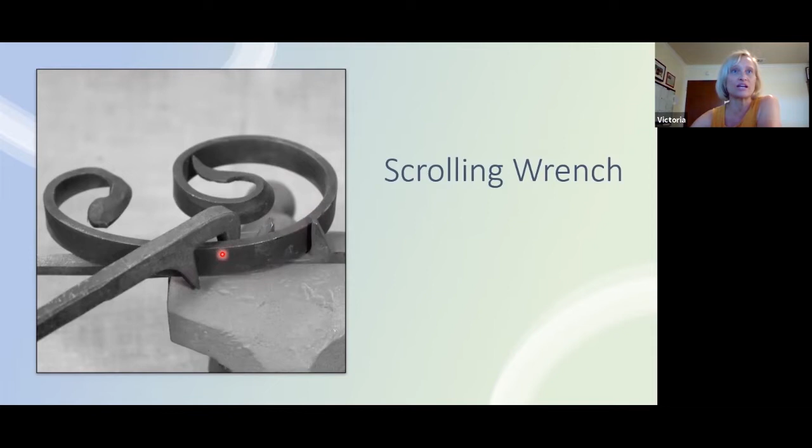The scrolling wrench is made with mild steel, and we can case harden that to get a little more life out of it, but it's not something you're going to be hitting, so mild steel and case hardening should be sufficient. For this demonstration, I'm going to use 3/8 by 1 inch flat bar.

It's a good material to have around, something you would use to make the scrolling tongs. You could also use other sizes. In fact, getting ready for this talk, I made a bunch of scrolling wrenches—I needed to refresh my tool chest anyway—and I found that the longer size, 1 1/4 inch, really needed to be done with 1/2 by 1 inch flat bar. So that'll probably be the next tool I make.

The most common sizes—and by size I'm talking about this gap—are 1/2 inch, 3/4 inch, and 1 1/4 inch. You're going to see those sizes again, so don't worry if you didn't catch all of them just yet.

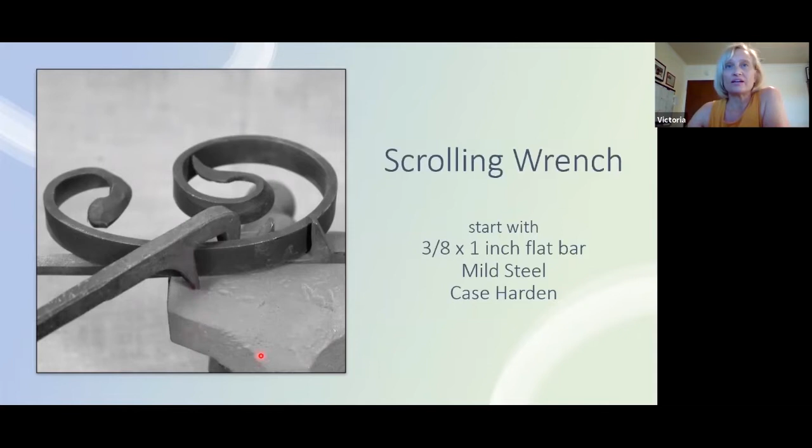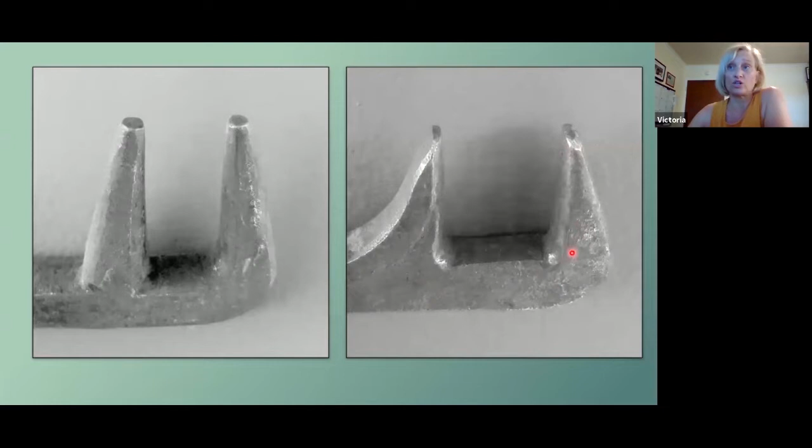The tines are 1 inch tall and can be of various shapes depending on your needs. I'm going to talk you through this Chisel Point tine, but you could also have cone tines, which might be helpful if you're bending something like leaf work, where you have a smaller area you want to get into and bend. This will be 3/8 inch wide and might not be as amenable to a tighter spot, but the Chisel Point, I find, works well for just about any bending I've needed to do.

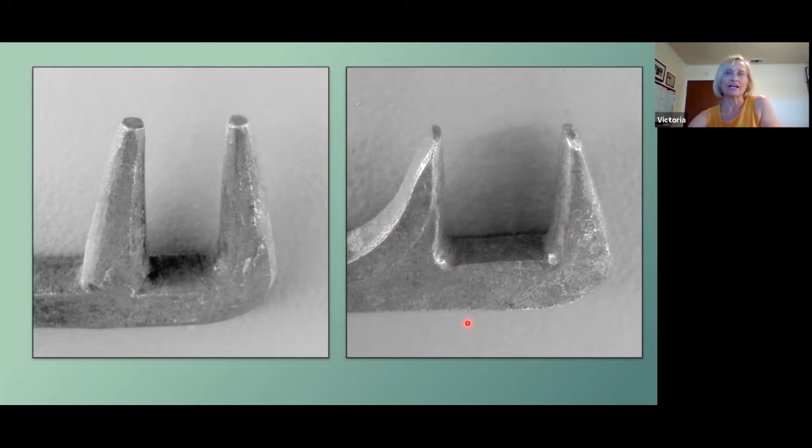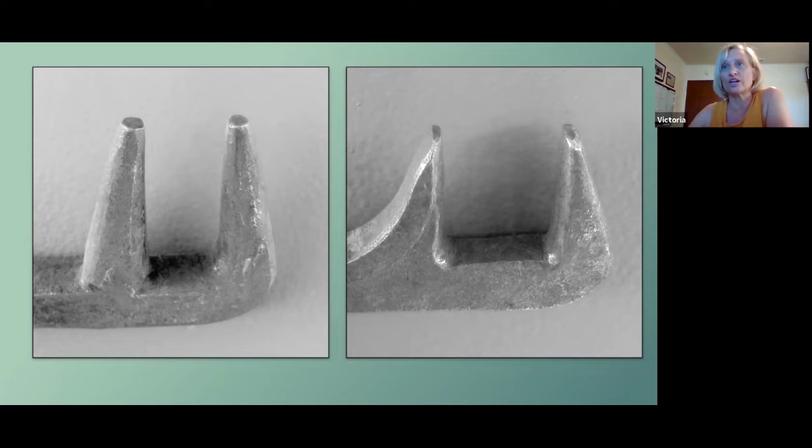The key point here, though, is that these inside edges need to be softened. If they're left very sharp or square, you will gall your work, because remember, the work is going to be hot when you're bending it. So the softer this edge, the less disruption you will have to the tool or the metal you're working on.

Our goal is to end up with something that looks like this, and have our tines line up evenly enough to file them into the right size. We're going to start by laying on our 3/8 by 1 inch bar about 1 inch, and set that initial shoulder over a rounded edge.

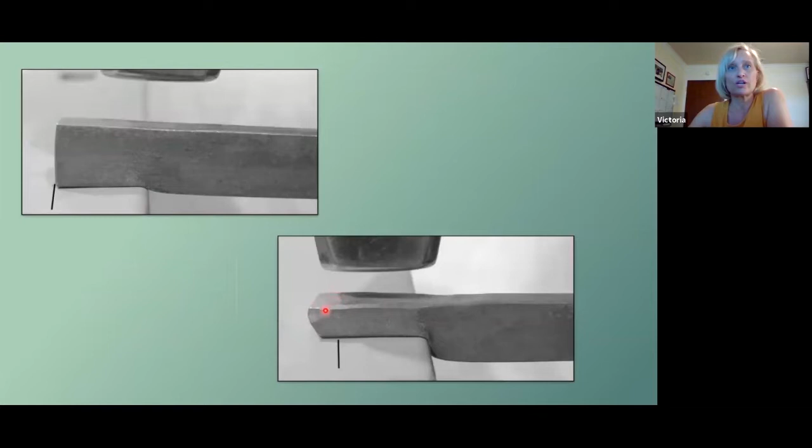As you do this, you're going to draw this out to a 1/2 inch square, and be sure to chamfer those corners. Anytime you're working with something square, softening those corners as you work helps you keep a good eye on how straight your piece is—it helps you see the high spots.

The goal here is to get a half inch on all four sides. That means it'll be a little wider than the 3/8 you're starting with.

Next step is to move to the off side of the anvil and lay off about a strong 1 inch—you want it to be an inch, but remember those rounded corners. You started up here with this shoulder and it ended up over here, so push this out at least 1/8 of an inch past that, or maybe even a little more, no more than 1 1/4, so that you end up with a good 1 inch pillow here.

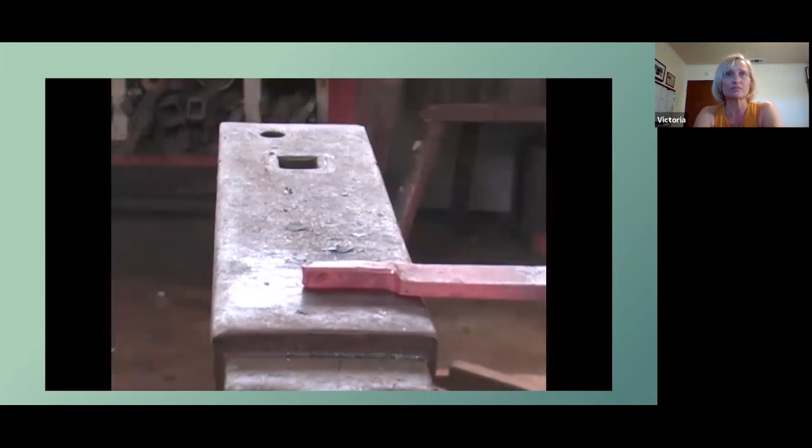Go ahead and set that shoulder down, and then you can start to draw out what will become your handle, taking that down to the same size you did here, that 1/2 inch. So I have a video to watch that in motion: we're laying on that initial 1 inch, keeping everything square, chamfering those edges, and keeping that just a little bigger than the parent stock.

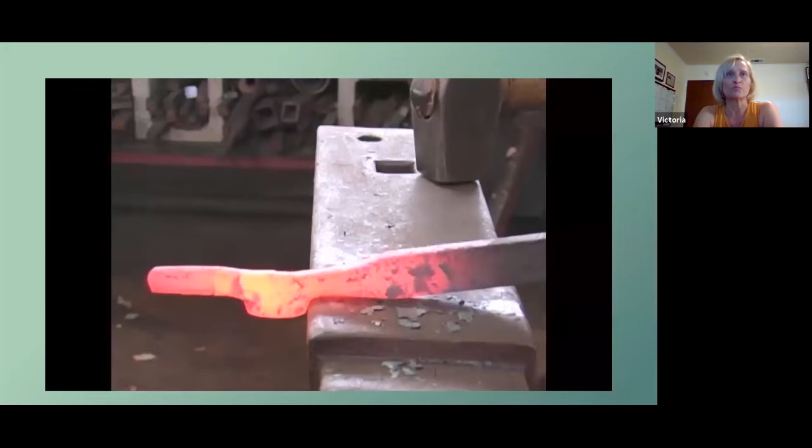Start your pillow on the off side and then draw down your handle. Anytime you're drawing down big material, moving to the bick is a good idea—it'll move a little faster.

So there we have the start of our scrolling tongs with a square on the end, a pillow, and the handle is started. Next, you're going to take that piece that you just forged and put it into a tool like this.

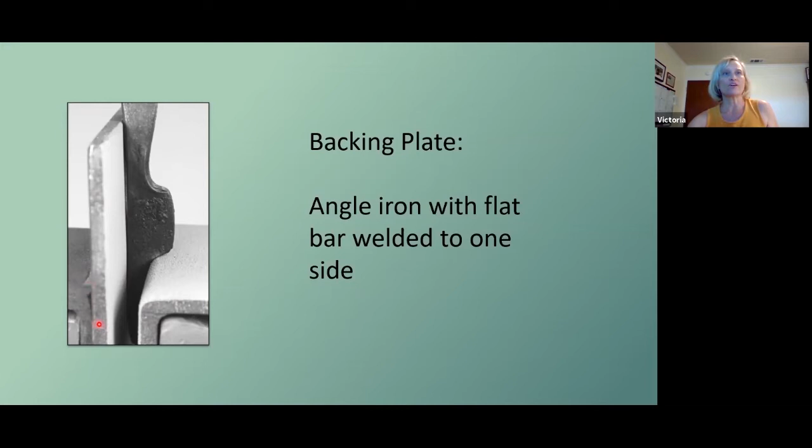The short end goes down in a tool like this—simply angle iron with a backing plate welded to it. You can see a little bit of the weld there. This apparatus placed in your post vise gives you a stable surface and keeps you from galling this backside of your tool as you draw this pillow out into a 1 inch long taper.

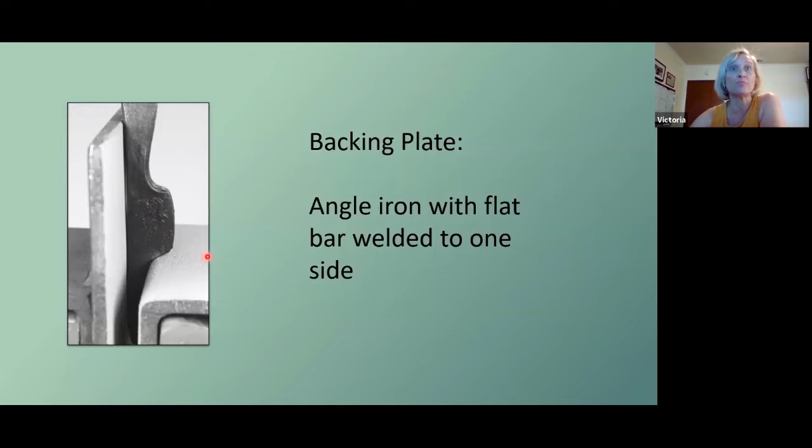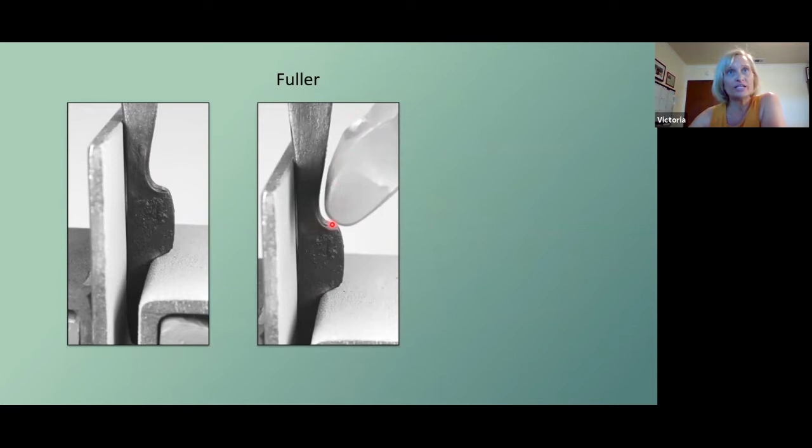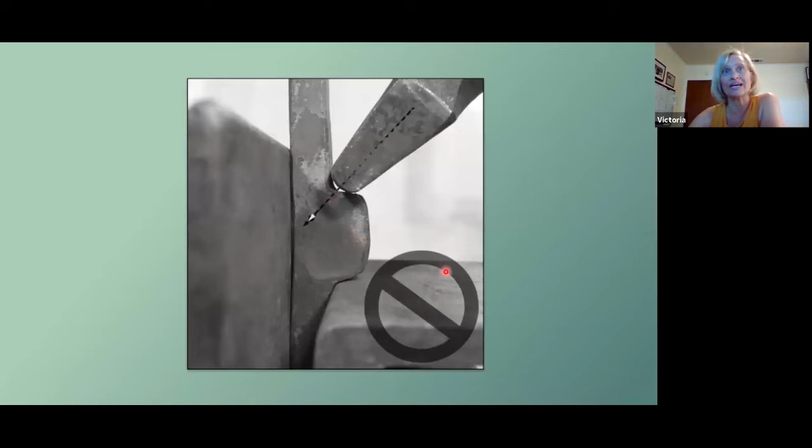You're going to do that by using a fuller, and the fuller needs to be at a fairly steep angle. If it's at too shallow an angle, you'll end up just drawing the material back this way instead of drawing it down and out. So you want to make sure that fuller is as upright as possible.

You'll initially get in there, grab it, but then you want to start pulling it down. Once you've started pulling it down, you can see that's been started—using a cross peen hammer to start to smooth that out will help it on its way.

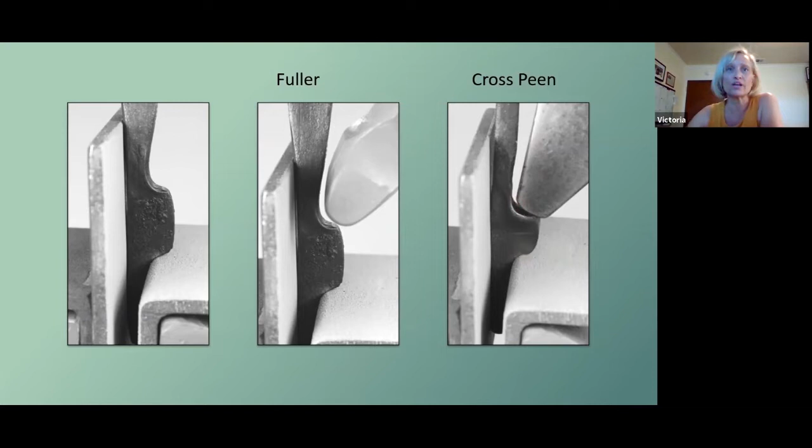As you push this material down and get started on drawing it out to a taper, it's going to grow in width and get thick. It's important to dress that thickness frequently. When you do that, you're simply hitting this here to correct the growth in width and get it at least back to the parent stock.

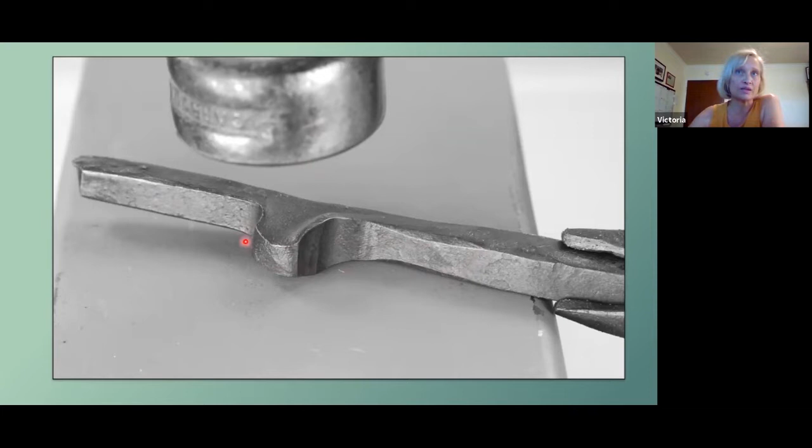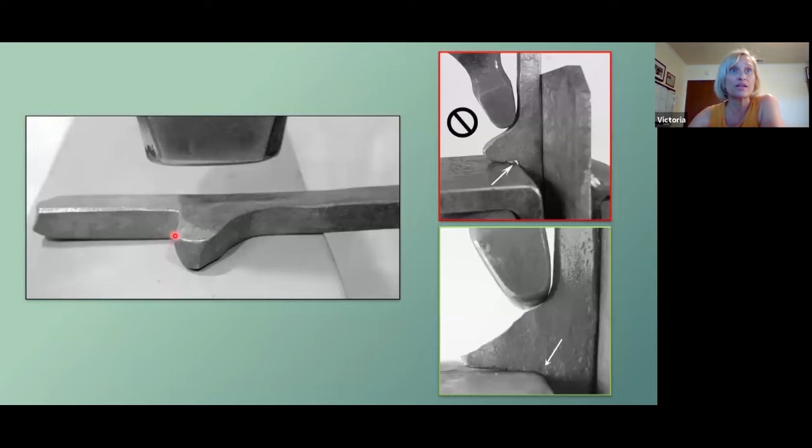This bar right here that you've started is going to bend to less than 90 degrees, like so. This has gone to a narrower angle than 90 degrees.

When that happens, when you put this part back down in your angle iron with the backing plate on the post vise, you could end up with a little gap here. As you continue to squish this material down, that air gap is going to create a cold shut—it's going to create a crack that will make you very sad later. So it's very important that you make sure this is kept at a 90-degree angle.

The easiest way to achieve that is by putting the tine, or what's on its way to becoming a tine, up in the post vise, and using a set tool that you will hit with your hammer to straighten this back out.

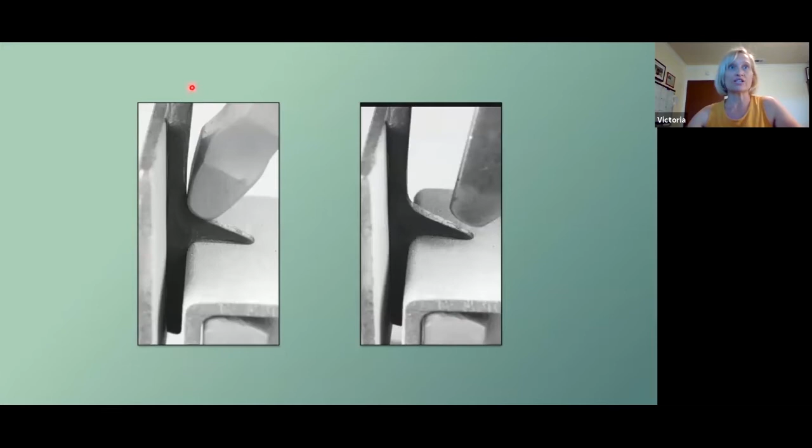Then it's just a matter of going through those three steps: back to your backing plate with your fuller and cross peen to correct for the growth in width, then make sure this is at a greater than 90-degree angle using a set tool.

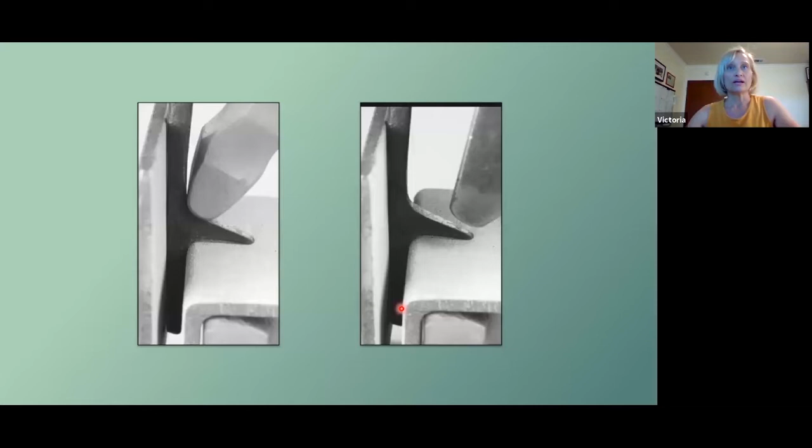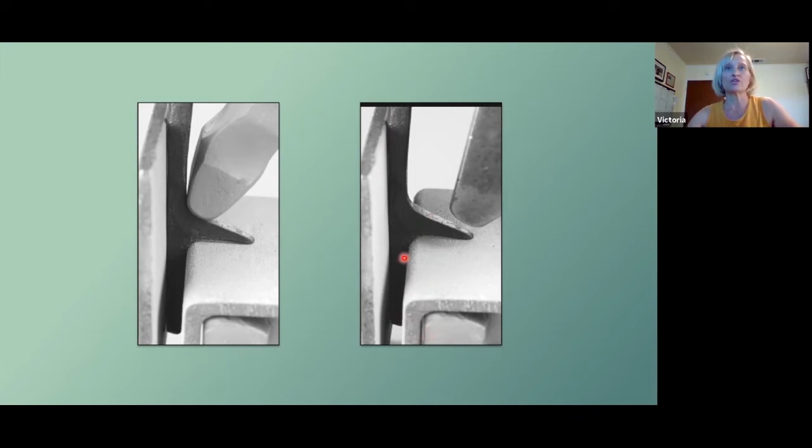I suppose you could hold this flat on the anvil and hit it, doing kind of an upsetting blow to push it back, but you run the risk of landing a blow somewhere else. So putting this in the post vise with the tine up and using a set tool is your best bet.

Then it's just a matter of going through those steps until you have this at about a half inch wide, and this will be 1 inch wide. And of course you want this to match that parent bar at about 3/8 of an inch.

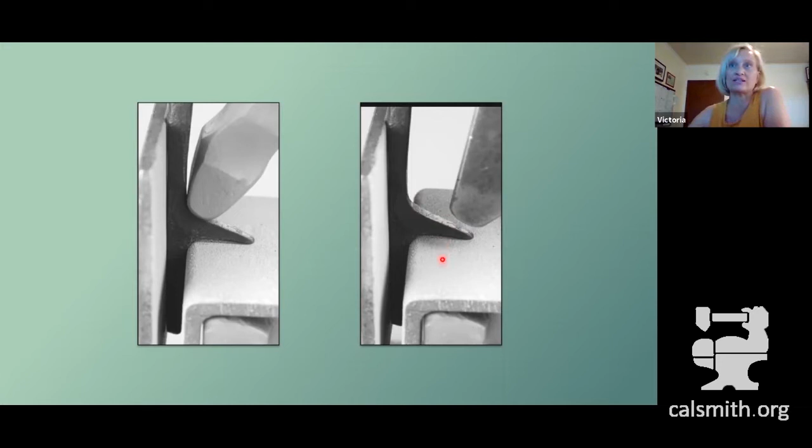So let's watch that happening on a video—get a really good view of this backing plate situation here too. Grabbing this material and pushing it down using a fuller, and this is a very narrow fuller.

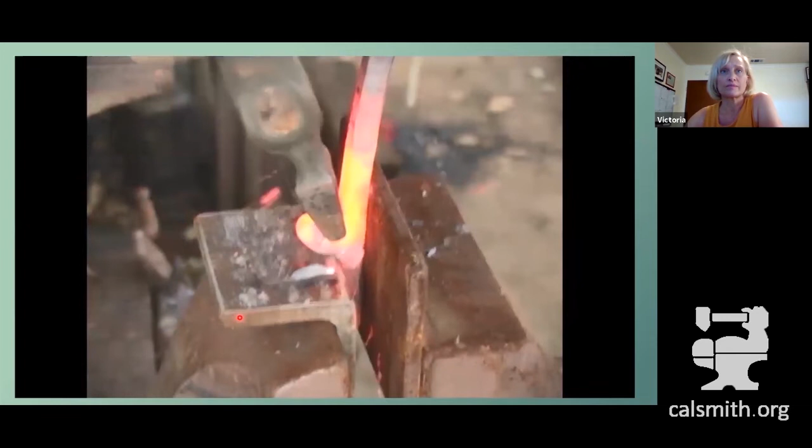Correcting for the growth in width, and then right back to your backing plate and your post vise to continue working that down. You can just see this leg kick up as you correct that growth in width.

So it's time to open that back up, and here's the set tool, opening that back up in the post vise.

So, a handful of heats, going through all those steps several times. Correcting for that width early and often is going to be important.

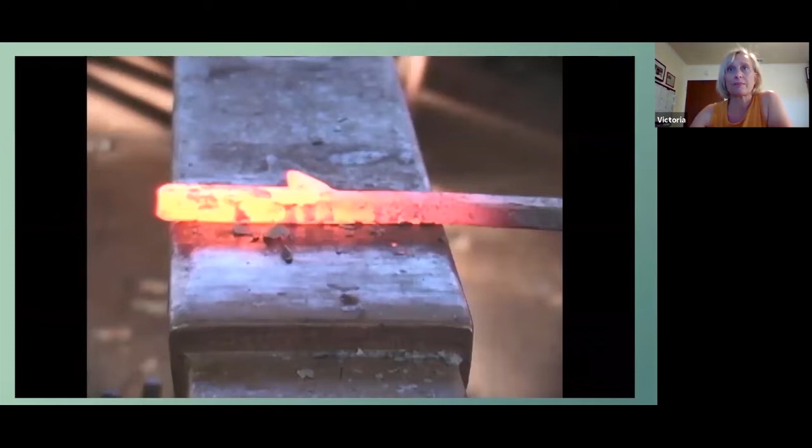So once you have your tine the way you want it, it's time to cut this off to the correct length. And I'm going to give you the answers—and I'll give them again later too on a chart, so don't feel like you have to write this down if you're taking notes.

So if you want a gap of 3/4 inch, the total length that you need is 1 3/4 inches. And I know that because using these three measurements, I can add them up and get to my 1 3/4 inches. The W is the gap, the desired gap or width that I want.

And in this case, it's this 3/4. The bend is roughly the same amount of material as you have width here, so that's a 1/2 inch. And then your height is cut in half because when you make this chisel taper, you are cutting the material in half - it's going to stretch 2 times. You can almost see that if this was its full length, that this is in half right here. You can see the imaginary half that I'm outlining with my laser pointer. So 1/2 of 1 inch, which is the height, 1 inch, plus 1/2, plus 3/4 gets me to 1 3/4 inches. So I cut that off, on the edge of the anvil.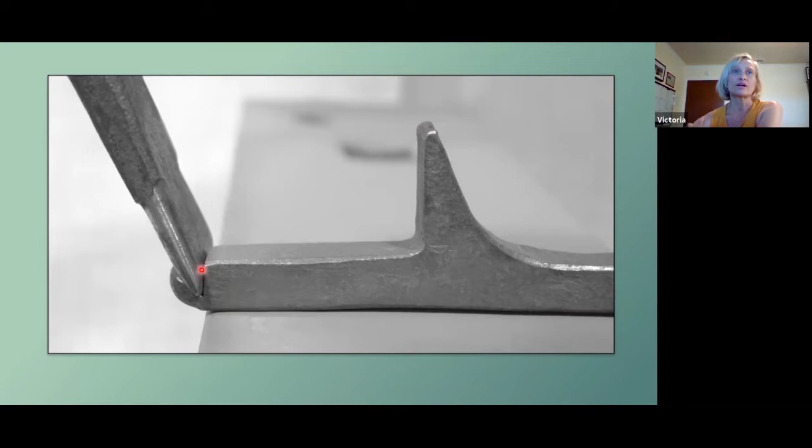And here it's been done conveniently with the tine up, and that gives you plenty of room to move to the side of the anvil. If you want to have this with the tine down, I would cut it at a slight angle so that you're set up for your next step.

Which is to make a taper. What you're seeing here is the tine out, stretching out away from us. It's on its side to remove some material, because we know when we make our point, it's going to grow in width. So if you get ahead of the material and remove some of the excess, you can then place this either upside down on the far end of the anvil, over a swedge block in the hardy hole, or here just on the edge with the tine down, getting your taper started. You just want to make sure you're not dinging up your hardy hole when you do that.

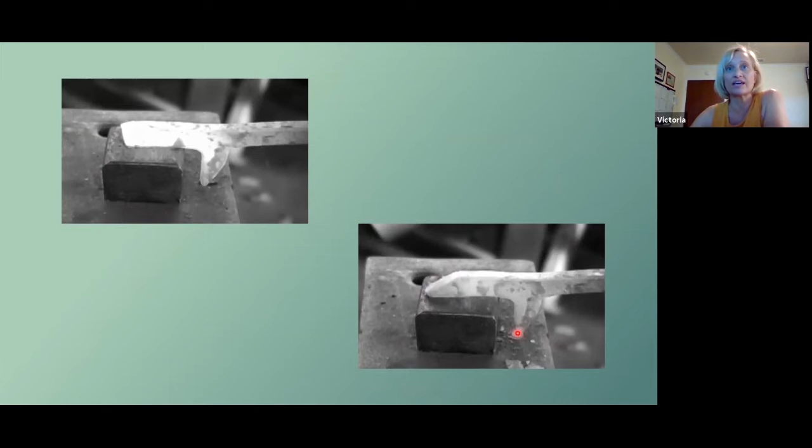But you're going to make a point, a chisel point, which is just a wide point. And anytime you're making a taper, which means you're making a point, you've got to get to the point - make the point first. So a very short point right on the edge. And here it's being done over just a block, a swedge block. So here you see a very shallow point, chisel point, and now you can taper that back to the 1 inch length that'll match this tine.

And here's the photo depicting that with the correct angle on your hammer, and this over an edge. Anytime you're trying to create a taper like this, if you do it in the middle of the anvil, your hammer really has no place to go. It should be angled, and you can see that if this didn't have a hole or a space to go into, you wouldn't even hit your piece - you would just hit whatever your hammer was over. So that's one way to really ding up your anvil.

This is your best chance to soften the insides. So we have our 1 inch taper here set, and just turning it up - you could do this hot with the rasp, turning it up, tine up in the post vise, rasp off both sides, including this tine as well. So now we get to watch that all happen on a video.

So we're cutting it off, a nice straight edge, which gives you a nice clean spot to start with. Remove the excess material, because you know it's going to grow in width as you make that point - get right to the point. Then take it back to your 1 inch, which is our desired tine width length.

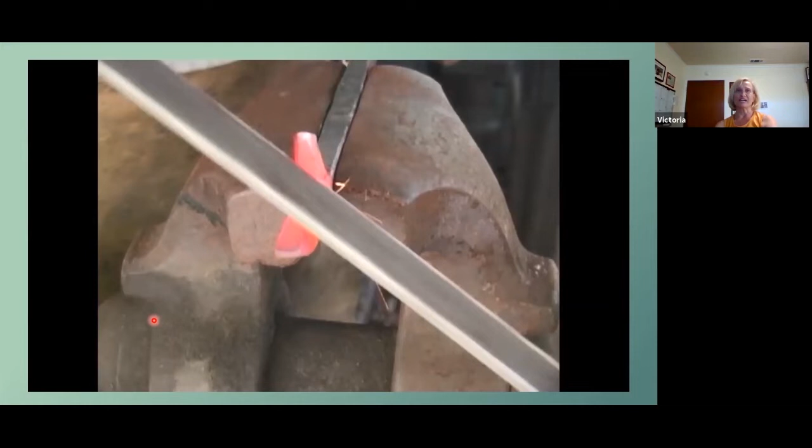Be sure to file it. You're going to want to move on to the next step, so make sure you remember that this filing - this is the best time to do it, unless you've got a whole drawer full of much, much smaller files. So using the rasp, this is the best time to do that.

Now we are ready to bend this around to even up with the neighbor here. And to do that, we are going to bend it around the horn, but this part, we don't want that to bend. In fact, we don't want it mucked with at all. So the best way to keep that from happening is to quench it.

We're using mild steel, there's no repercussions for that. So make sure that you're only putting it down that 1 inch, which, your line of sight is pretty clear here, the edge of this taper, maybe just a little past, leaving enough hot for the corner material and then the gap that you want.

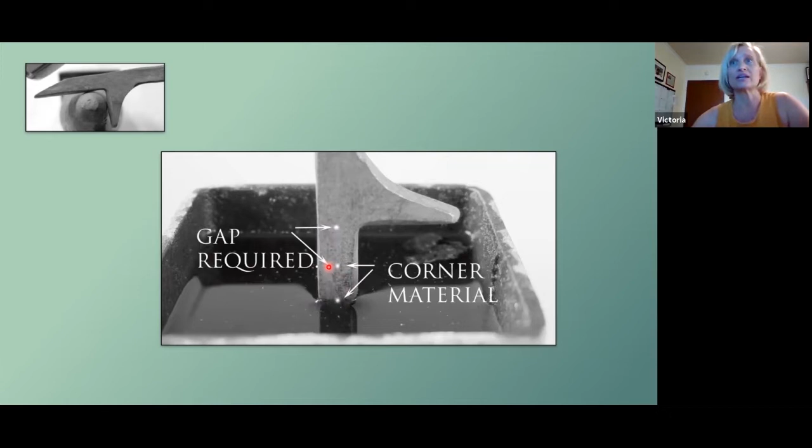Once you've quenched this, move quickly to the bick and bend this around. When you're bending, anytime you're bending, you want to do it over - I always say over air. If you're here in the anvil, it means you're forging and you're hitting or squishing your iron in between this hard surface and your hammer.

So with bending, always make sure you're over nothing. As you bend this, it's gonna kind of push into your gap, and it's gonna bend up here too. So correcting here and bending, just keep your eye on this to make sure this part stays straight.

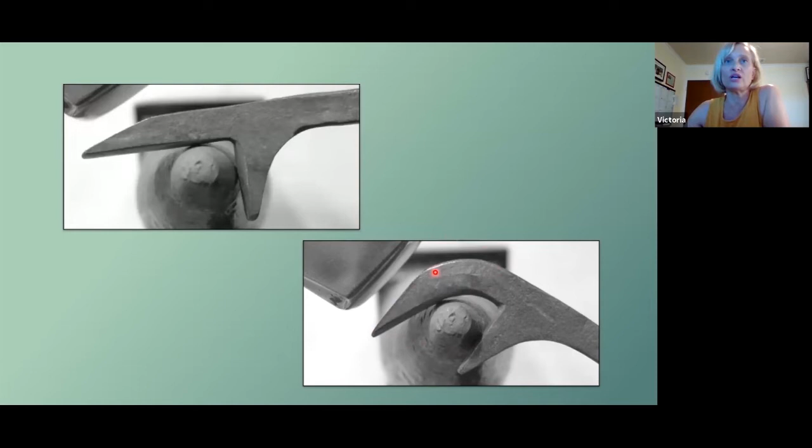What you don't want to do is bend this closed to 90 degrees. You want to keep this open a little bit, because using the method you would use to make square corners, you're going to upset this back into itself and give you a little more material here in the corner. So with this tine up on the anvil, and you might need to take another heat at this point. If you do that, re-quench this tip.

It's going to be important that you're not deforming this. You're going to end up with a little mushrooming, which you see here, and mushrooming is just anytime you hit the top of the metal and it starts kind of leaking over the sides. That's called mushrooming.

So with this quenched, this hot, you're going to hit on an angle. If you were to hit straight up and down, this would just roll out and kind of defeat the whole purpose of the bend you just made. So you want this at an angle, kind of matching this angle. But one way to think about it is you're hitting down towards your knees. Smith is over here, hammer is angled, and you're hitting towards your knees, which is a little different blow than you normally do.

Once you've got that upset back into itself and you have your corner here, and it's not going to be a completely square corner, you'll have this round edge here, then you are ready to heat this all up and put it handle down in your post vise. And here we're using our backing plate again. This is the same angle iron and backing plate we used earlier.

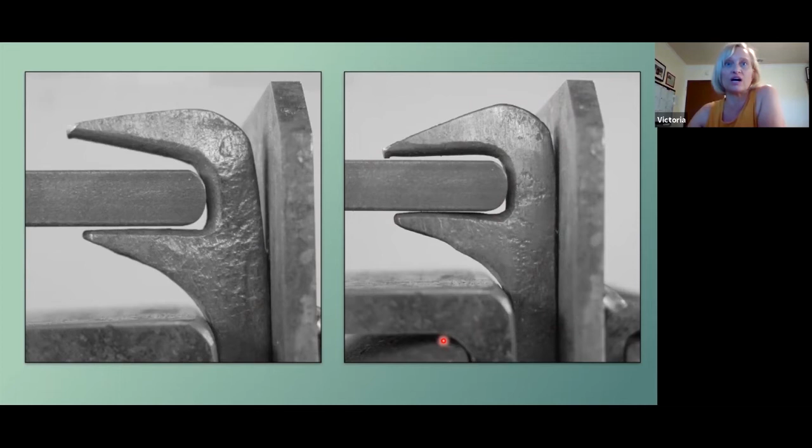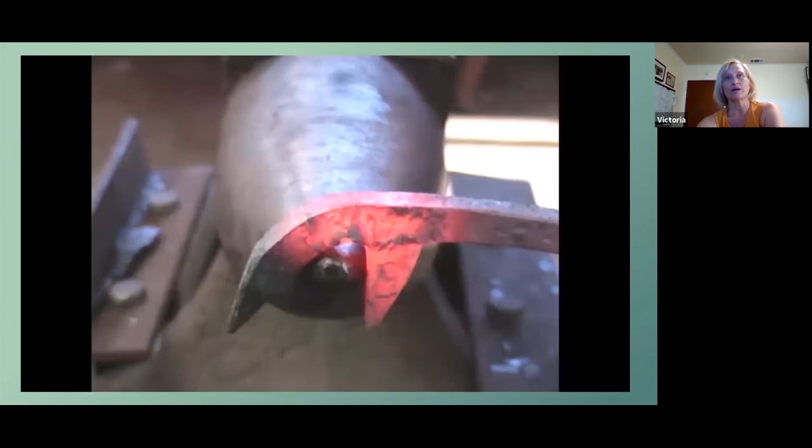Once you've got it standing up straight against the backing plate, now you can tap it down here so that you have your 3/4 of an inch gap, or whatever gap it is you are trying to make. So let's watch that happen. We've quenched the tip, and there it is. You can see this goes up, and you just got to keep it straight, working the bend, working that back the way it started.

You can see the tine is considerably longer at this point, so that angled blow back towards your knee upsets this down into the corner. And you might have to take more than one heat. Definitely had to for this tool here. And then that's just a light tap to get it into place. Make sure everything stayed straight. Sometimes it might get a little twisty.

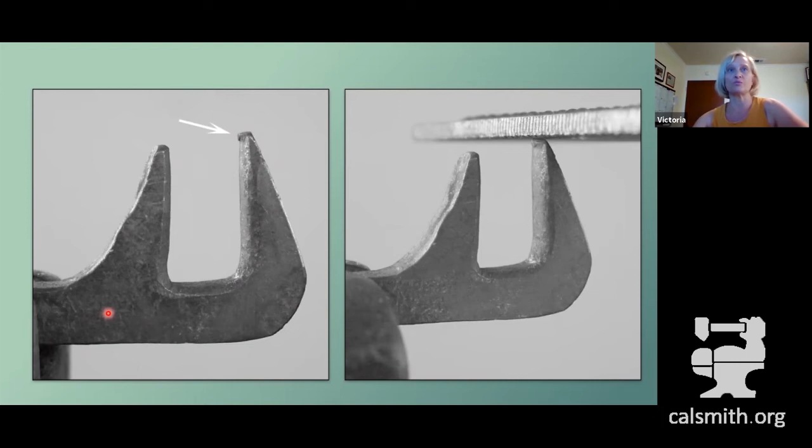And now you're ready to file off any of the mushrooming that happened, or if this is a little bit longer than the other side, you can even things up with the rasp. And you would again do that hot. So once this is made, draw out the rest of your handle, and I like to take it to about 12 inches. I brought some with me here, so maybe if we ask questions or at the end, I can show you those.

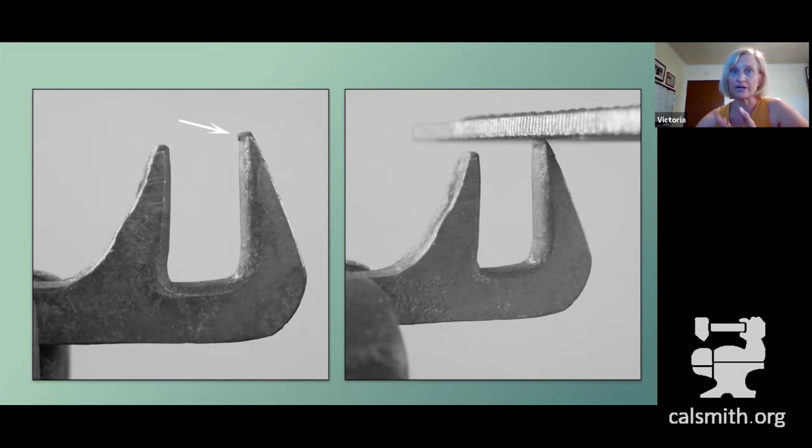I like it to be about 12 inches long, and then at the end you could put whatever handle you want, but an eyelet is a nice feature because now you can hang it up out of the way. And that's just a matter of drawing out a rod to a 3/16 diameter, and it should be fairly even all the way around, and bending this then around into the correct shape. But if you are wanting to be specific about what this internal diameter is, you need to know how long you need to cut this.

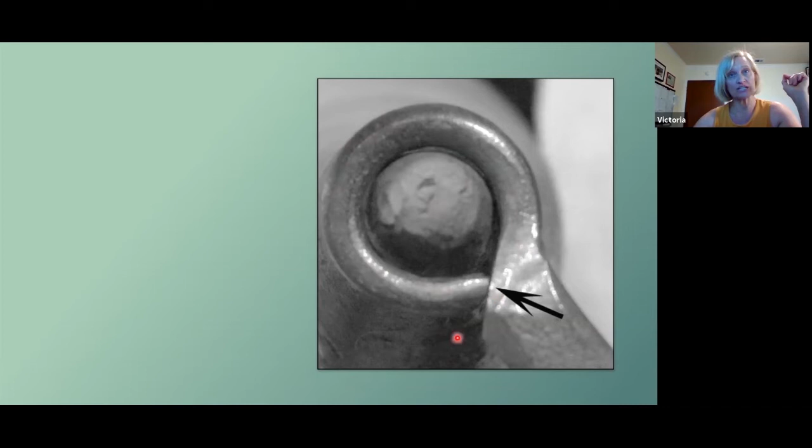So here comes some math. If we want a specific internal diameter of 5/8, we would use this formula, because what we're looking for is the circumference. We're looking for how long this piece needs to be. And that's a simple formula of pi, which we know is 3.14, blah, blah, blah, and the diameter, this blue bar here. And you may be asking, why am I going all the way out to this yellow line? Well, this yellow line is something called the neutral axis.

And it's called the neutral axis because that's the only part of this rod that doesn't change its length as you bend it around the horn. The outside metal has a longer distance to go, so it actually ends up stretching but shrinking this tip right here. This actually gets shorter than what you started with. The inside gets compressed, and that metal has to go somewhere. It'll pooch out to the side, plus make that end longer.

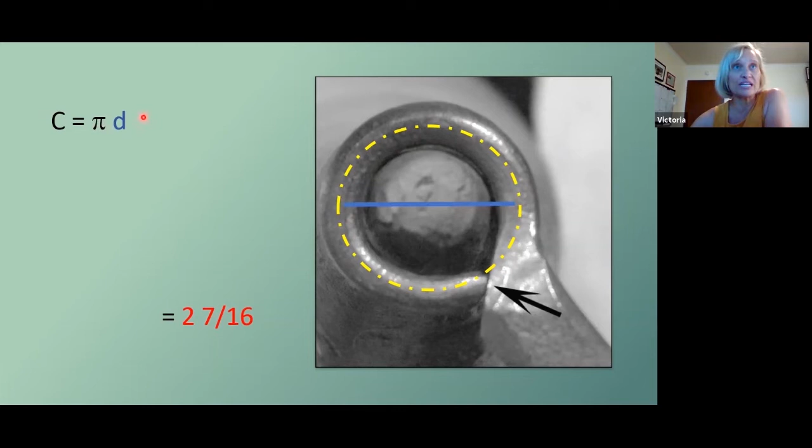If you saw the basket handle talk, I explain it there with some different diagrams. But for our purposes here, you just need to know that this neutral axis is the start and end of the diameter that we need to fill in the formula. And here I've filled it all in for you and nicely color coded it.

So this little bit here, this 3/32 and 3/32, which is half of our 3/16 bar, and 2 halves make a whole. So you just add the 3/16 back in, plus the middle, which we dictated was going to be 5/8. And you'll notice that I'm only using 3 here. That 0.14 for true pi adds about 1/7. And, you know, we're not machinists, we're blacksmiths, so we're not going to worry about that. We're gonna make that part simplified because it's close enough.

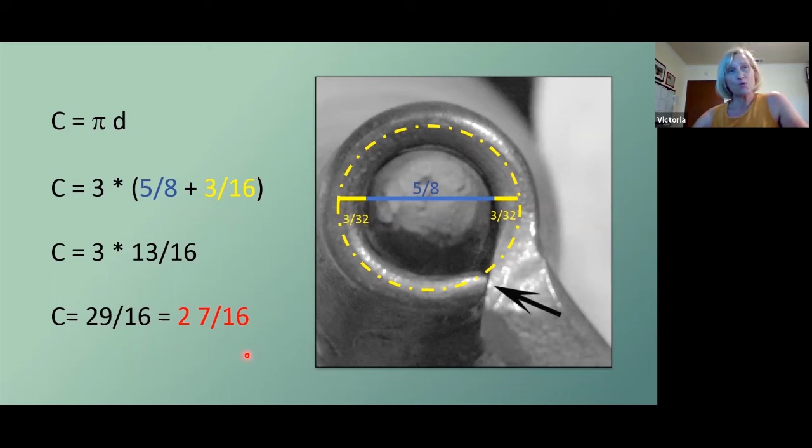And we're just going to take the 3 times the 13/16, and that gets you to the answer that I already gave you, which was 2 7/16. But while we're here, let's do a little more math, because how did I know that I needed to start with 1 inch to get those tines to line up, right?

The trick is to make sure that you have enough material so that you can cut off a clean end. What you don't want is to get to the point where you're cutting off that 1 3/4 and you don't have 1 3/4. You'll be tempted at that point to draw that bar out. Remember, it was a 1/2 by 1/2 square at that point. You'll be tempted to draw it out, which is going to make it kind of weedy. We want to leave as much material there as possible. So it's important to know what amount you need to start with to get the right amount here.

Now you could just hedge your bets and start way back here and make a nice long taper and then cut off your 1 3/4. And that's an acceptable practice. But if you want to take your blacksmithing to the next level, understanding a simple concept that allows you to do the computation to get to the right answer is going to be extremely helpful. It'll also really impress your friends.

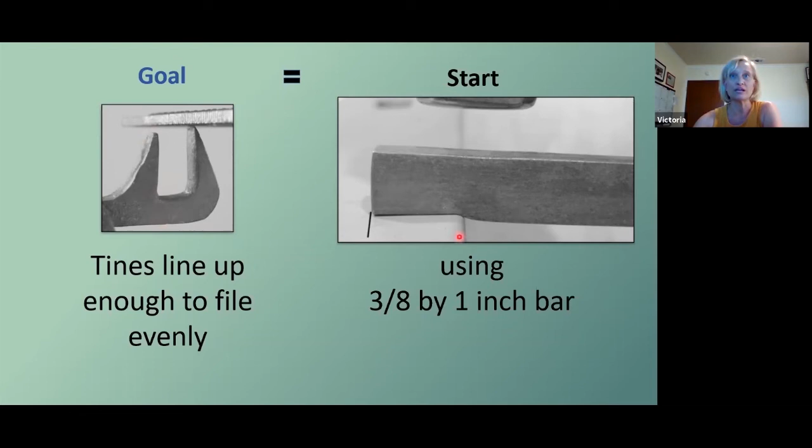The first concept I want to discuss is that this amount, when we're back to 1 inch, and this amount, when the gap is 3/4, is the same volume. If this was a piece of clay and you stretched it out and made it into a different shape, you didn't change the amount of clay, you just changed the shape. So what we're talking about is setting two volumes, this volume and this volume, equal to each other. And the volume formula for anything that's a straight edge is fairly straightforward. It's the height times the width times the length.

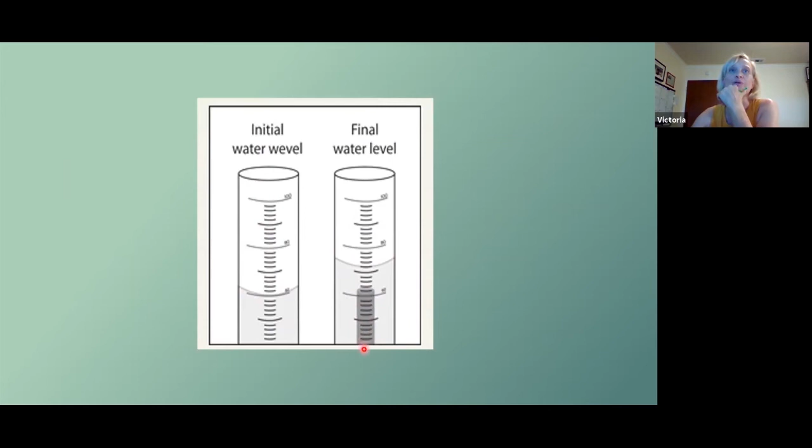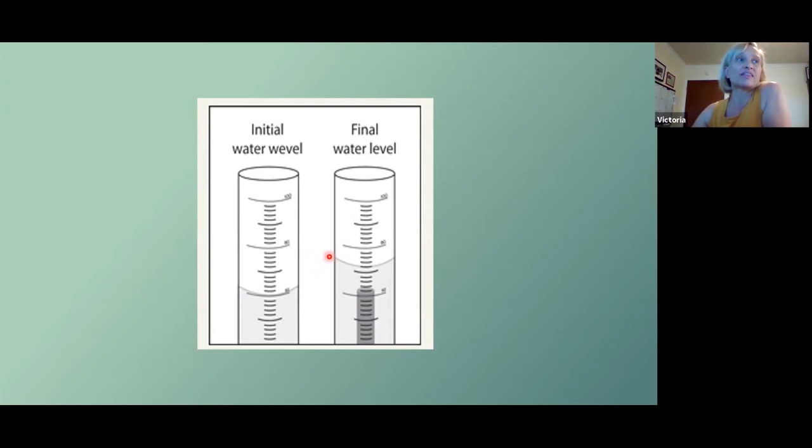So you could take how much you want to have as your goal, put that in some water, note what the water level gets to, and then take your starting piece, put that in the water, and when it gets to that same water level, you've displaced the same volume. And then you'll know how much to lay on at that point, or how much material you need. I'm going to suggest that we do this with numbers and just set these two measurements equal to each other.

So here we're back. We know what our goal is, and we know that we want this to be 3/8 wide by 1 inch tall, or half inch tall. And the length is the only thing in dispute, depending on what your gap is. And over here, we know that we're starting with 3/8 wide by 1 inch height, and we need to know what our length is. So I'm going to call this the length goal and the length start. That's what the LS and the LG is about.

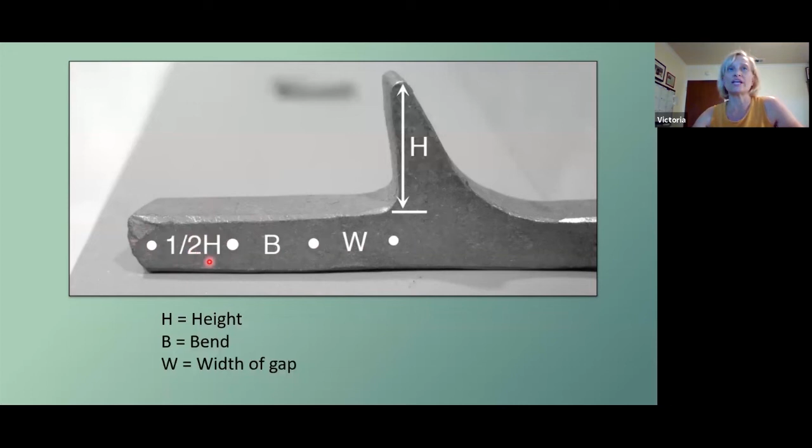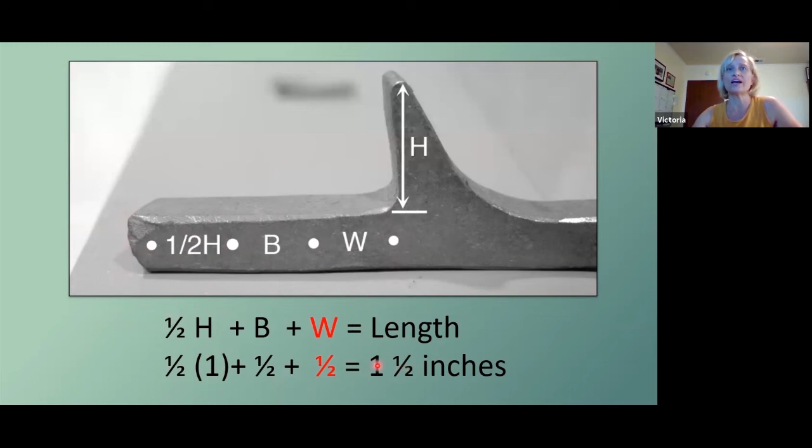So let's start with our goal length, because we got to know where you're going, or you're not going to get there, right? You saw this already with the width of the gap, the bend, which is the width of our material, and then half our height, which we know is 1 inch. We're going to put the number to that, and in this case, I'm going to use 1/2 of an inch. That's going to be our width, and I know that I want from here to here to be 1.5 inches. So now I can fill in this part of my formula, and now it's just a matter of solving for the length that we need to start with.

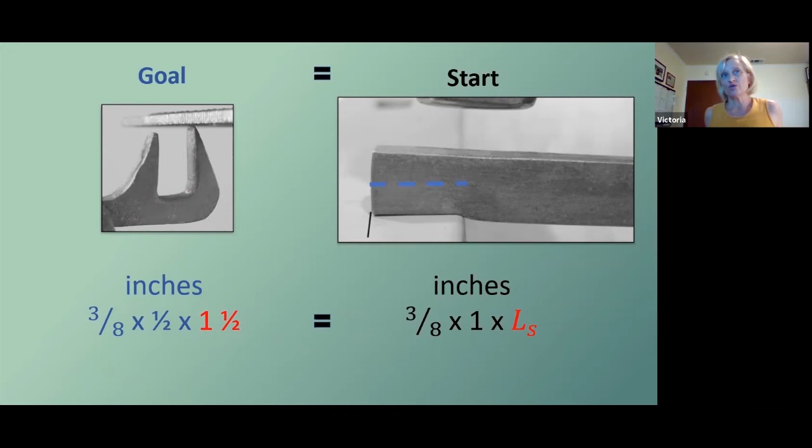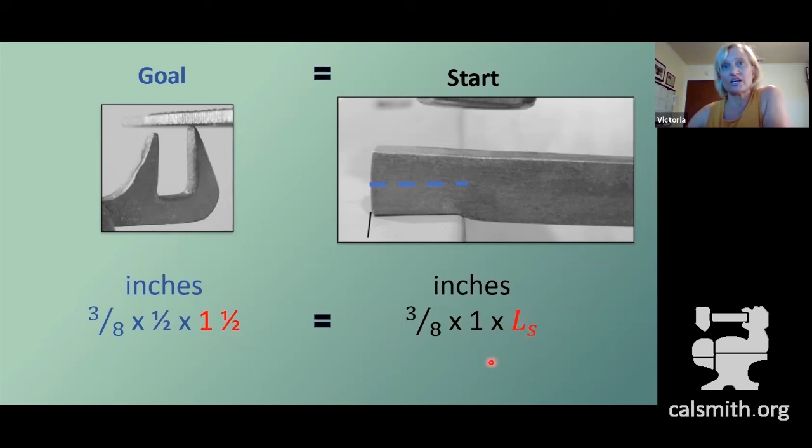But if I know that from here to here is 1.5 inches, you could kind of do a visual test of if I'm starting 3/8, I've got 3/8 and 3/8, so I don't have to worry about those. Those are going to end up the same. But here I'm going to take this to half the size of this 1 inch to start with. So I could just cut this in half, because I'm starting with 1 inch, and if I take that down to a 1/2 inch, it's going to stretch out, meaning I just need to have half the 1.5 to start with, which is 3/4. So we kind of know that our answer is 3/4. So let's see if the math bears that out as well.

So now we got some simple algebra going on. We've got two equations equal each other. We want to isolate for our variable, meaning I'm going to times all these together. I'm going to times this together, and then divide it into here, which for a fraction means you turn it upside down, and solve for the length to start. And there it is, it's 3/4.

So if we do the math for all three sizes that I mentioned, a 1/2 inch, a 3/4 inch, and a 1 1/4 inch gap size, the length, once we have our initial tine, is 1 1/2, 1 3/4 for the 3/4, and then 2 1/4 for the 1 1/4. And I know my lengths to start. But since we're using that rounded edge, I'm going to add a little bit, because remember, my goal is to end up with a little more material than I actually need. So it never hurts to pad it at this point just a little bit. So we're going to add 1/8 of an inch, and here's your lengths to start. And if we go back to our 3/4 inch gap, there's your 1 inch.

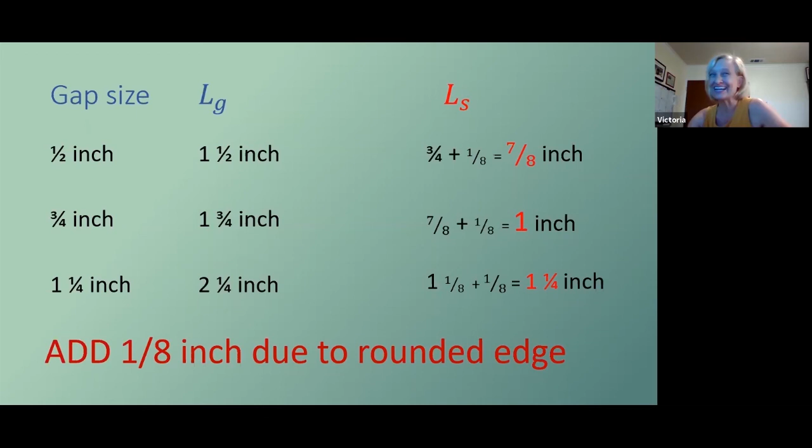So how are we doing? Anybody have any questions? Or if I don't see Greg's face pop up, I'll assume no. Now he's talking, but I don't. We seem to be doing pretty good. I'm not seeing any questions. All right. Yeah, we can continue on. We can sally forth. There we go.

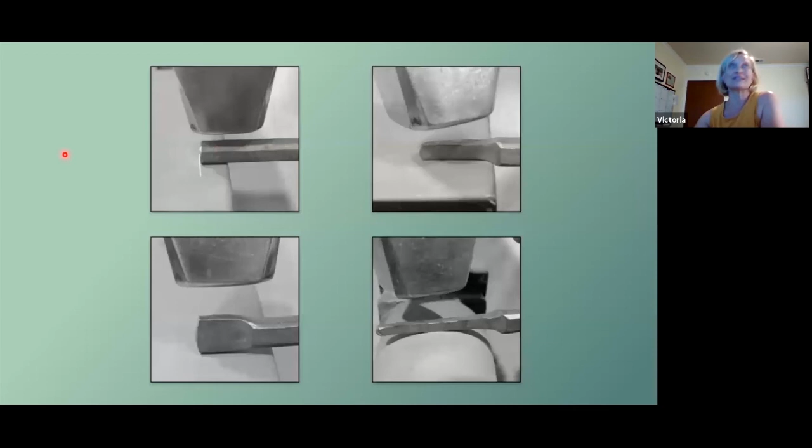Okay, great. So now it's just a matter of finishing up your handle to that 12 inches long, because remember, that's where we left off before I went off on the math situation. And keep that about 1/2 by 3/8. Make sure you chamfer all your edges. It is a tool you're going to hold in your hand. And now we're going to lay off 5/8 of an inch. And that same volume formula applies here. We want to draw this out to a 2 7/16 inch length, 3/16 inch wide rod. And if you start with 5/8, you'll get exactly the right amount.

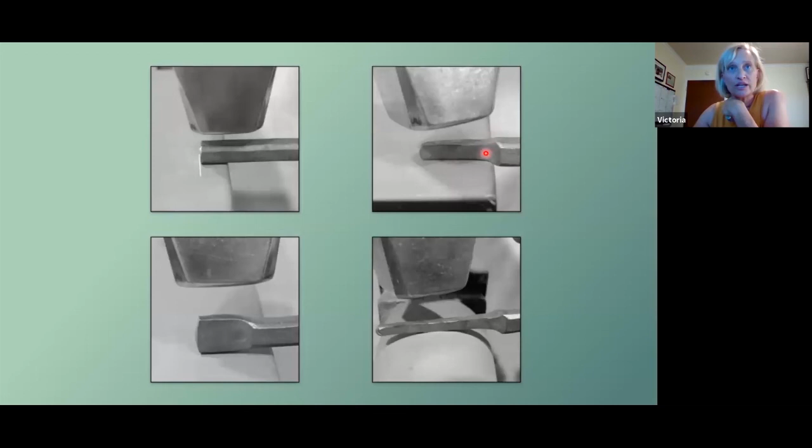Start first by setting a shoulder on one side, and then correct. Here it is, the shoulder. This is what was face down. Correct for the width here. Bring it back to the side of the anvil, and you could use a guillotine tool at this point, but you want to bring in the shoulder on each side. It's not very much, so this is a really good chance to practice your hammer control. Just hit from both sides. So, a couple hits here, turn this over, a couple hits on the other side, because you want to keep this in the middle. And then it's a matter of drawing this out so that it's 3/16. Start wide. Anytime you're going to take something to round, you start with the square.

You can go over the horn to draw it out. Once you've got your square drawn out, I would make that a little wider than 3/16, because as you take it to octagon and then to round, it's going to continue to stretch in length and get a little smaller. So once you have the prescribed width, now you can cut it off to your 2 7/16 material.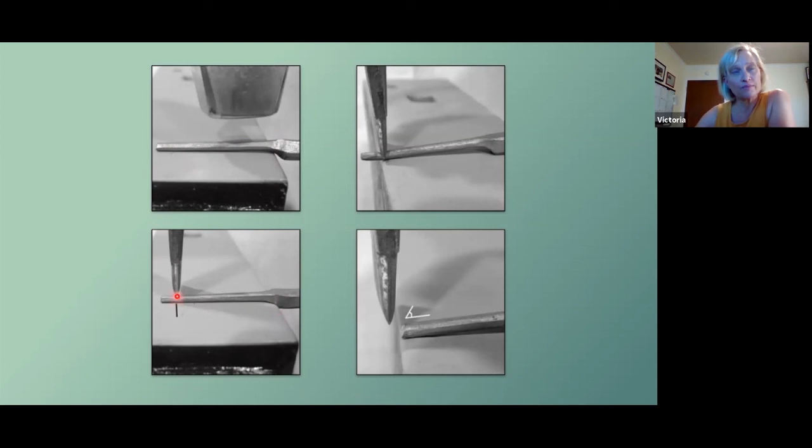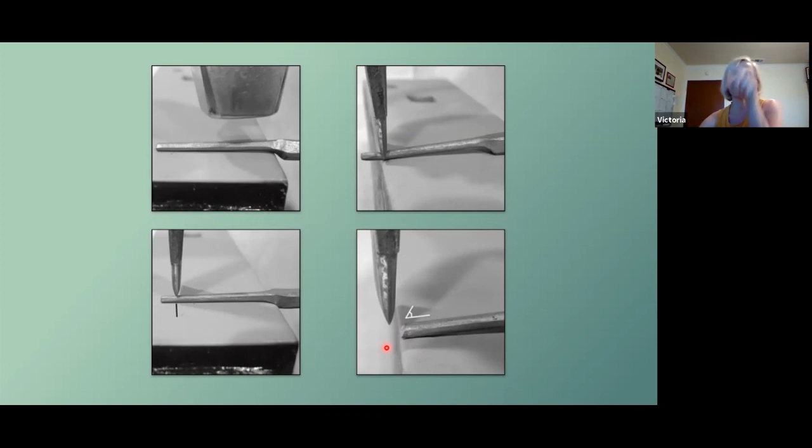If you put this down and protect the shoulder, this is going to automatically, just because of the lack of resistance from this little nubbin here, create a slight taper on the end. That slight taper is going to tuck in nicely to the side of the eyelet when it turns round and meets the other side.

Here you're 2 and 7/16 inches. I've said it several times, but I want to make sure you have that information. Now you're ready to turn the handle over, and you're going to bring this out as far as this is wide, which is 3/16, and start to bend it. Use a cross peen or even a small ball peen hammer to start the bend, and as always, you want to be over air to get that going.

Once it's about a 120-degree angle, dress this and make it look all nice. When you're dressing it, make sure you're not galling the underside. So very gentle taps, and make sure this is hot enough.

Once it's bent and dressed, bend your ends. Bend this end and then the tip, because those will be harder to fix later. Get them to the 5/8 round, get that started, and then it's just a matter of bending it over the horn.

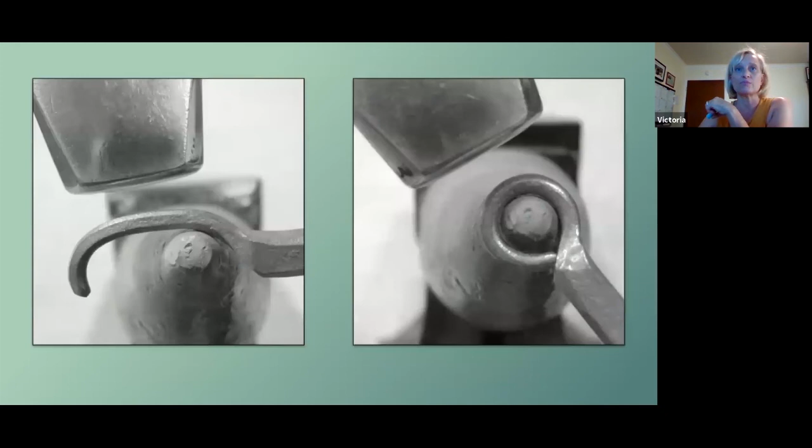As always, when you're bending, not forging, you're going to take this straight down, lower the hand that's holding the material, and it'll just snug up nicely around. You can see that our little slant here, our little taper, tucks in nicely to the end. All right, so let's watch that happen.

We're cutting it off to whatever length you want your end handle to be, and drawing the handle down the rest of the way.

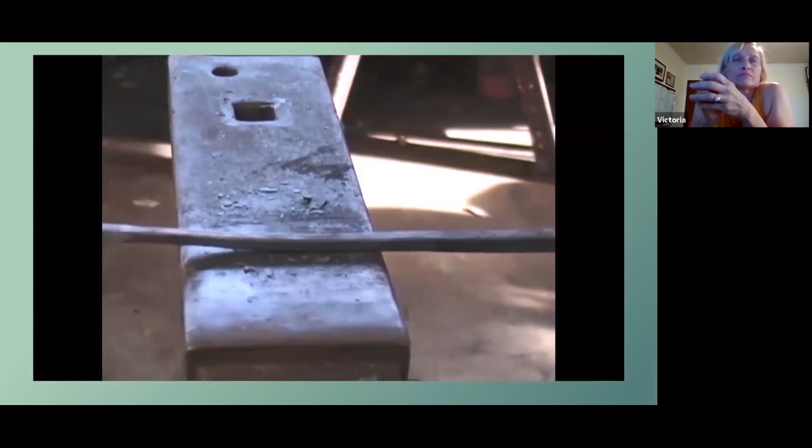Now we're measuring out to draw out our eye at the end of the handle. So you set the shoulder on 3 sides, and then it's just a matter of drawing that out until it's 3/16 wide. You start with square, go to octagon, and then make it round. Anytime you're rounding, you never want to hit the same spot twice.

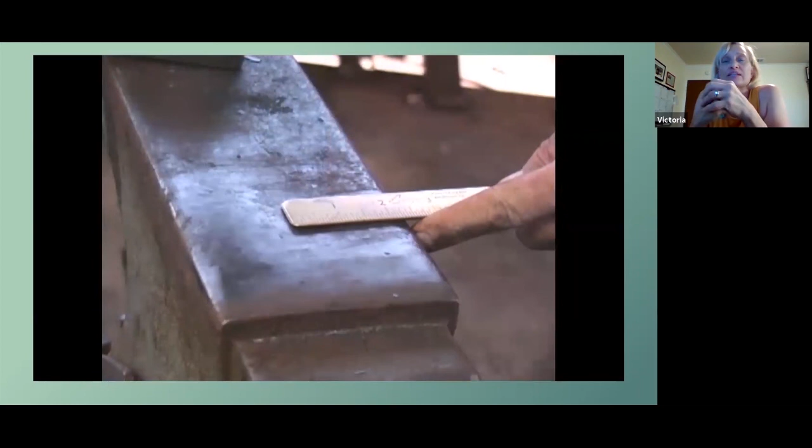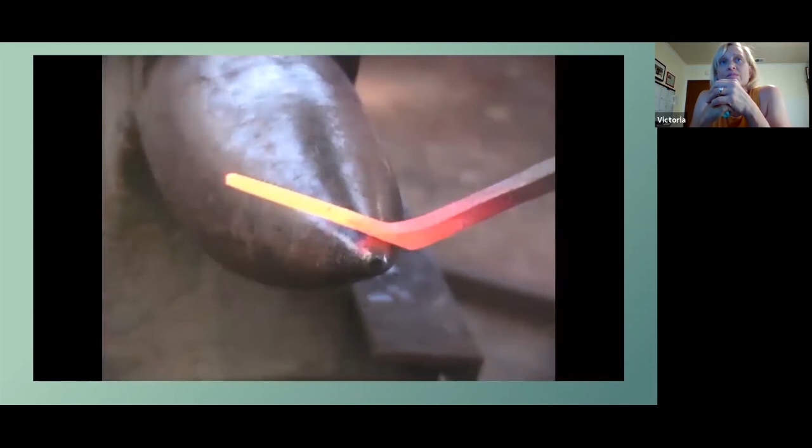Cut it off at the 2 and 7/16. Get you the nice little taper at the end. Bend it to that 120 degrees. And then start your curling or bending around the anvil, and then hitting over air.

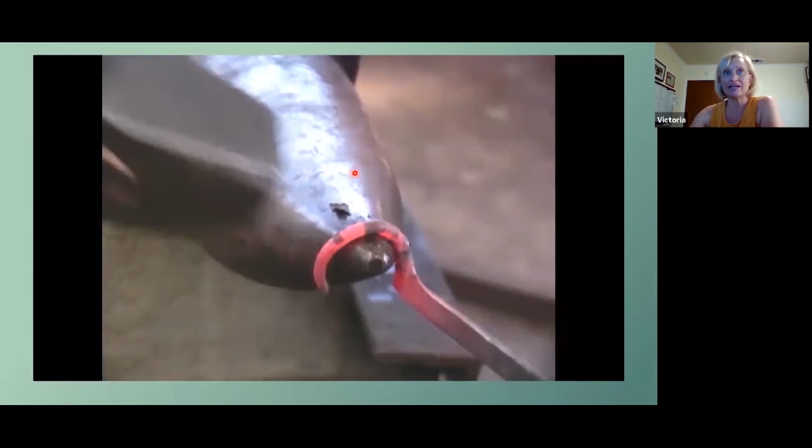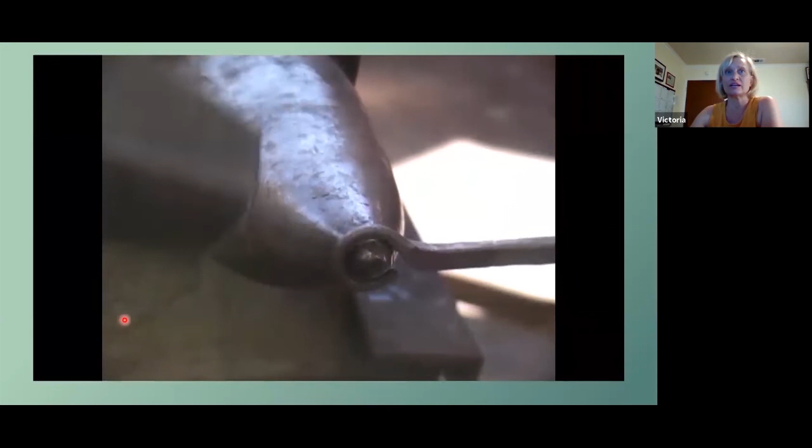You should not hear the anvil ring at all. Moving the material hand, and you can get that snugged up there nicely. Anytime you go to a circle, you don't want to hit the same spot twice. Notice how softly those hits are anytime you're over something hard.

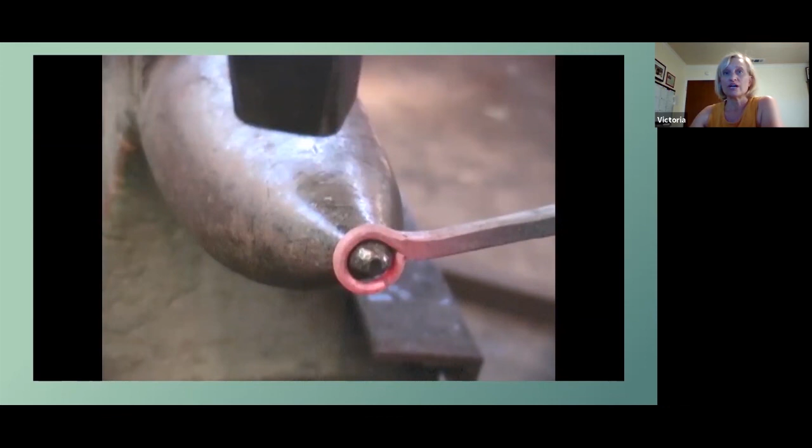So that'll get you your nice little eyelet. You want to make sure it might get a little crooked in there, so you'll want to make sure it's centered up. So now you can take your tine end and case harden it.

Case hardening is like adding kind of a hard outer shell, a lot like an M&M candy. The whole goal here is to help your tool last just a little bit longer.

This isn't a class on metallurgy or the details of this, but essentially you're just going to follow the directions on the jar, which is heat your piece to 1650 degrees and apply the carbon and flux, which is what this material is.

This is gonna smoke a lot. This is not something you want to breathe in. I kind of stand out of the way. It'll be a very obvious plume of stuff you shouldn't breathe in. So make sure you're not breathing that in. I'll wear a mask sometimes too.

So apply your compound while it's hot, reheat it, and you can reapply and reheat if you want a deeper hardening. But when it looks wet, when you've got that back up to its cherry red color, when it looks wet, you're going to quench it quickly in some water, and you should hear a loud pop. It's like you're turning the carbon to gas to get it in there to permeate and create that hard outer shell.